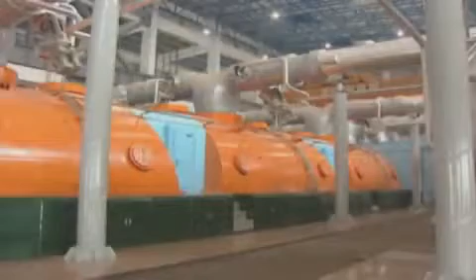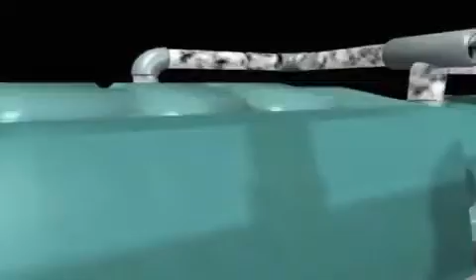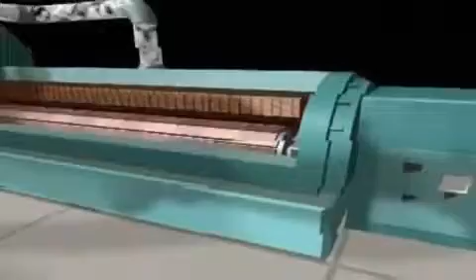In most generating plants, whether coal, nuclear, or natural gas, some form of energy is used to heat water into steam. This steam turns a turbine that is coupled to an electromagnet called a generator. The generator produces electricity. While the model is the same, there is a key difference between nuclear energy facilities and other electricity generating plants. Power plants that run on fossil fuels burn coal, oil, or natural gas to generate the heat that creates steam.

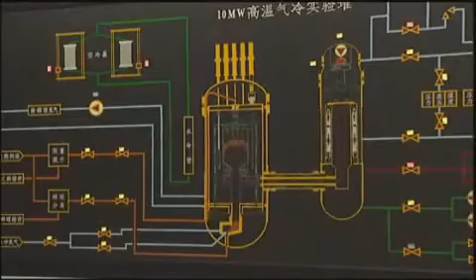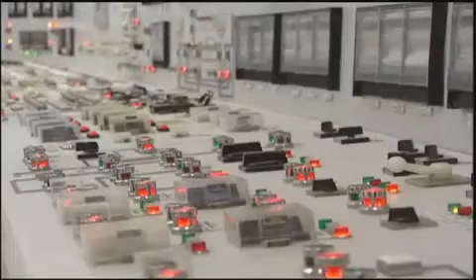In a nuclear energy facility, a chain reaction of splitting atoms releases heat. This reaction takes place in the reactor. All reactors are designed, built, and operated with safety as a top priority. Nuclear energy facilities are among the safest facilities in the world because they feature multiple redundant layers of safety systems and procedures, beginning in the core of the reactor.

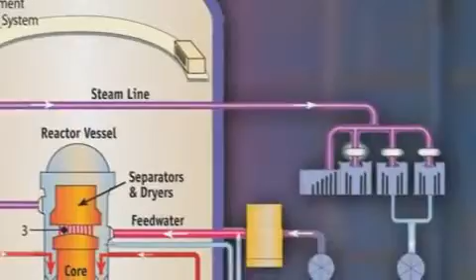In a nuclear reactor, metal rods with enriched uranium pellets inside are placed into bundles, creating a fuel assembly. The bundles are submerged in water inside a pressurized vessel. The two most common types of nuclear reactors are boiling water reactors and pressurized water reactors. In a boiling water reactor, the heat from split atoms causes the water to boil, producing steam that drives a turbine. Afterwards, the steam is converted back to liquid water and returned to the reactor core.

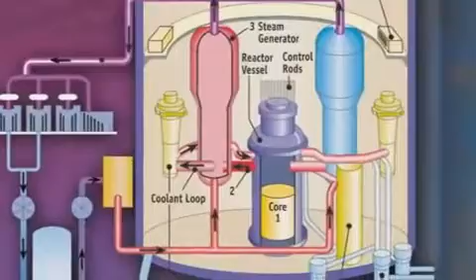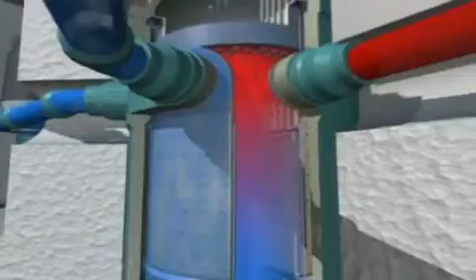Pressurized water reactors, or PWRs, were developed after boiling water reactors and work in a slightly different manner. In a PWR, the water in the reactor tank is under pressure to keep it from boiling, even though it reaches very high temperatures. In the steam generator of a PWR, water passes through thousands of small pipes. The heat in the pipes turns the water to steam, which then drives the turbine. The turbine powers the generator, which in turn produces electricity.

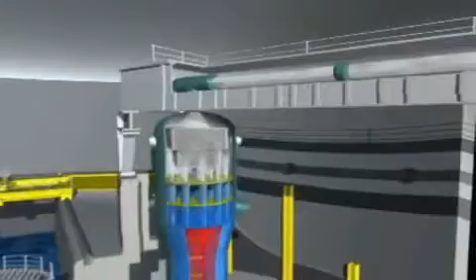Here is where the process differs from a boiling water reactor. The reactor water is now pumped back into the reactor tank and heated again. The steam from the turbine is cooled in a condenser, and the resulting water is sent back into the steam generator and heated again.

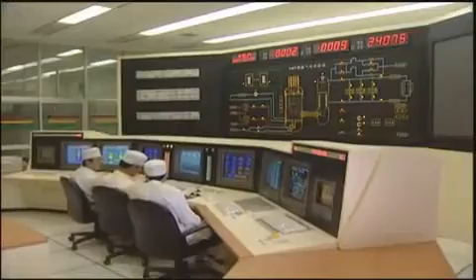To prevent overheating, control rods made of a material that absorbs small atomic particles are inserted into the nuclear fuel bundle. When an operator wants to produce more heat, the control rods are raised out of the bundle. To create less heat, they are lowered into the bundle. The rods can also be lowered completely to shut the reactor down in the case of an accident or to refuel the facility. With this level of control, the operator of a nuclear energy facility is able to ensure that it continues to generate clean, safe, and secure energy.

Additional safety systems are in place that shut the reactor down quickly and stop the fission process, cool the reactor down and carry heat away from it, and create barriers to contain any radioactivity and prevent it from escaping into the environment. Nuclear energy facilities are the most efficient source of electricity in the world.

By developing a nuclear energy program, the UAE is leading the way for other nations that may look to generate clean, safe electricity in the future. Nuclear energy for the UAE. Part of a bright future for our people.